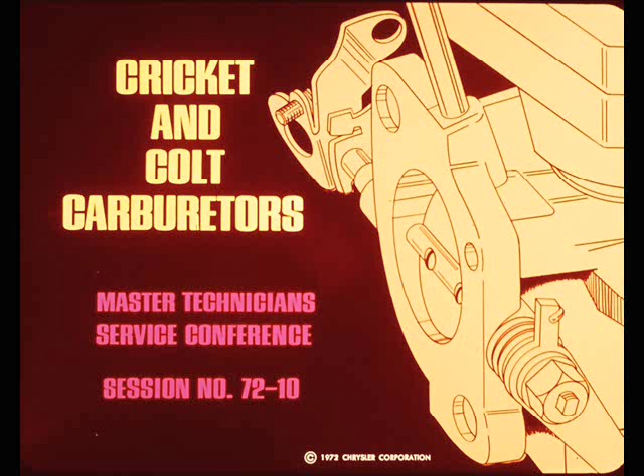Fellas, it's a double feature this time. The subject is carburetors for both the Cricket and the Colt. Either of these cars may show up in your service department, so it will be to your advantage to know both sides of the story.

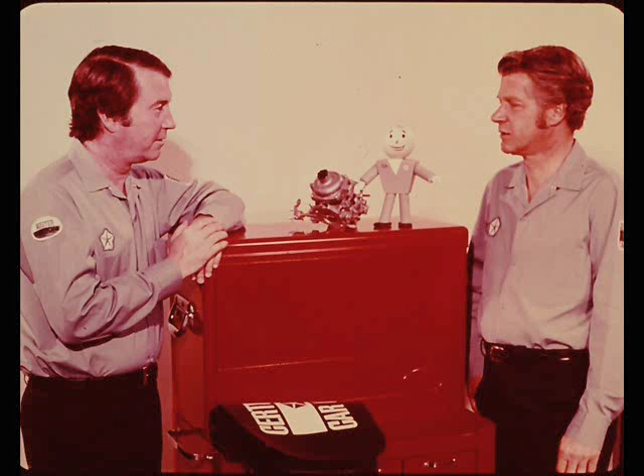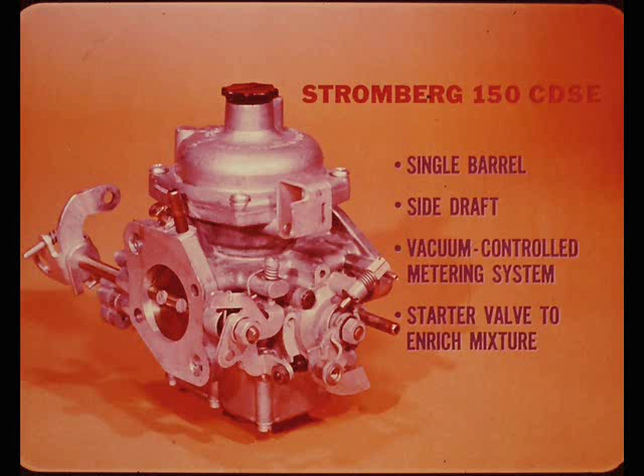And to tell this two-in-one story, we've got two good men. Mike, who knows Cricket carburetors from depression chamber to starter valve assembly, and Fred, our man with the know-how on Colt carburetors. Let's begin with Cricket. Ready, Mike? Ready, Tech. Cricket carburetors look different from more familiar models, so description comes first.

The basic Stromberg 150 CDSE carburetor is a single-barrel side draft type. It has a vacuum-controlled main metering system and a mechanically operated starter valve to enrich the starting mixture.

Some part names also need explaining. For example, CD is the model designation for a constant depression type carburetor. This simply means that there is always some vacuum in the depression chamber when the engine is running. The S stands for a separate starter valve assembly, and the E for emission control.

Now, beginning on the outside of the carburetor, the main components are the depression chamber, starter valve assembly, main body and throttle, float chamber, throttle bypass valve, and the temperature-controlled air bleed valve.

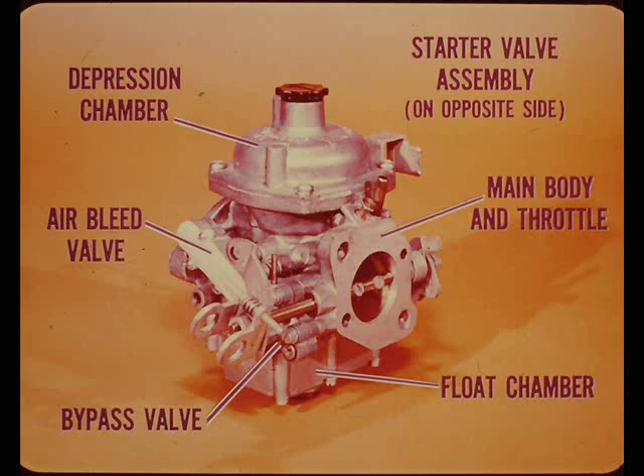On the inside of the carburetor, we have the air valve, including its operating diaphragm and the metering needle, the main jet assembly, and the float and needle valve assembly.

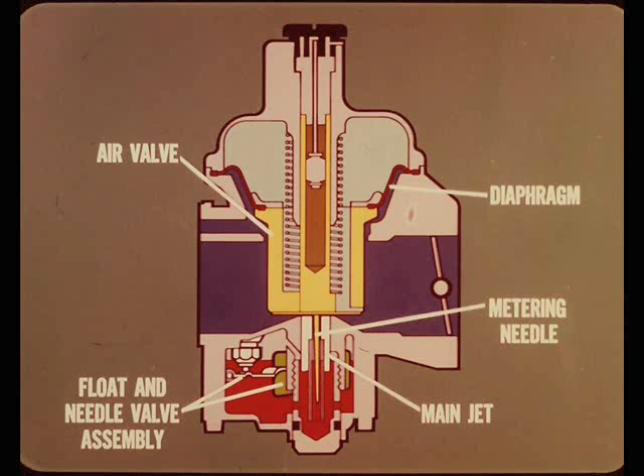Now let's describe the main components. The depression or vacuum chamber is a dome-shaped airtight housing, which also provides an alignment guide for the air valve spindle. This chamber closes off the upper side of the air valve operating diaphragm and the inside of the hollow air valve.

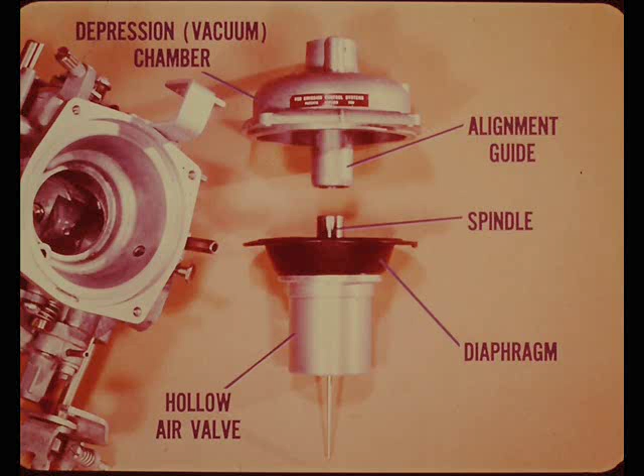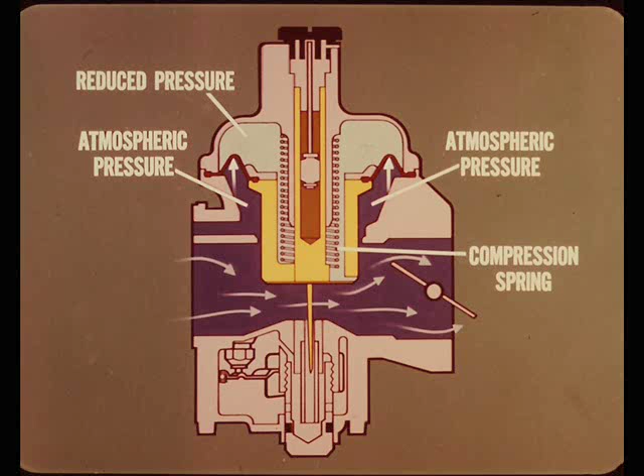In operation, reduced pressure inside the chamber in the air valve allows atmospheric pressure to push upward on the underside of the diaphragm, raising the air valve. A compression-type spring inside the air valve helps to balance the upward movement.

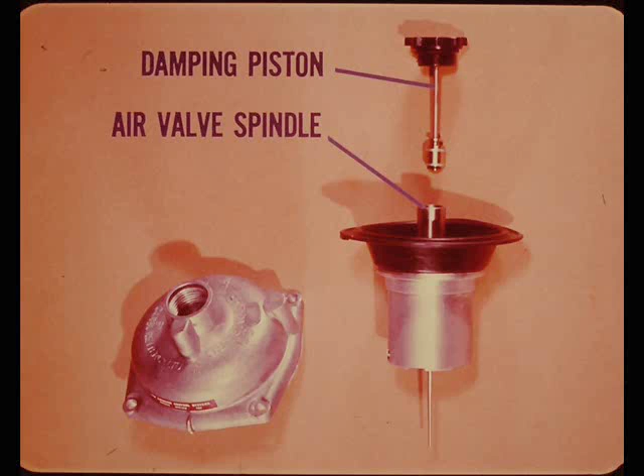The hollow air valve spindle keeps the valve in alignment as it moves up or down. This spindle also forms a cylinder for the hydraulic damping piston and carries the oil used for air valve damping action. Damping piston action prevents the sudden upward movement of the air valve when the throttle valve is opened quickly at low speeds for acceleration.

However, as the throttle valve closes, the spring-loaded air valve can move downward with no resistance when depression chamber vacuum drops because the air space above the damping piston is vented through a drilled passage.

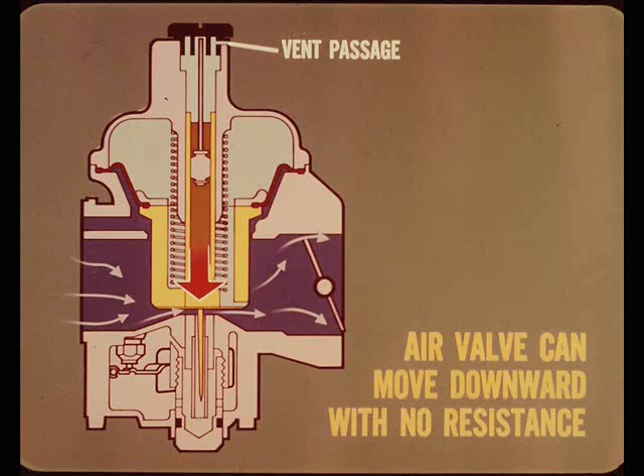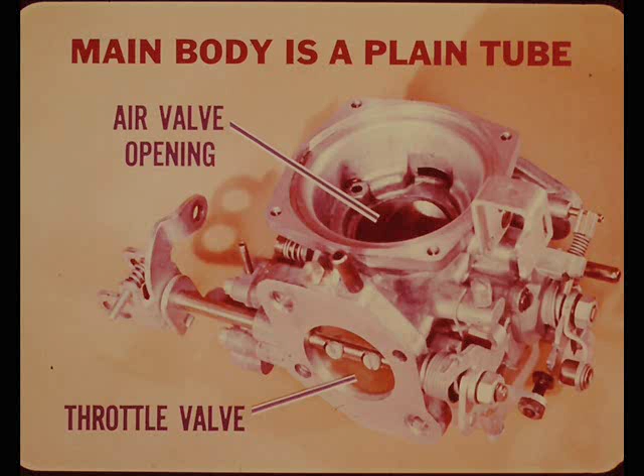Next, we find that the main body of this carburetor is a plain tube with no protruding nozzles or venturis. It has a throttle valve at the engine manifold end and an air valve opening in the midsection. A raised floor section narrows the main bore in the main jet area.

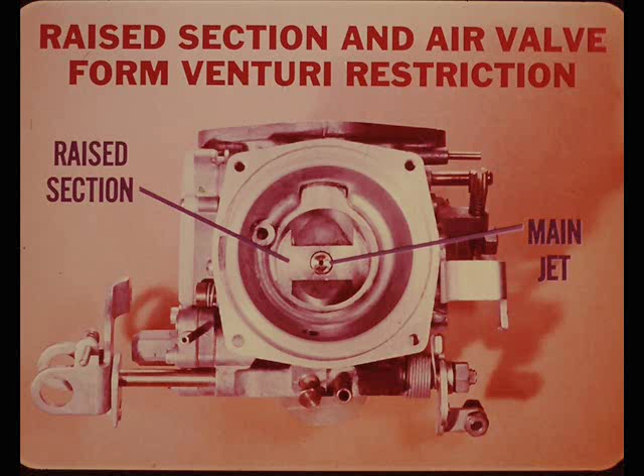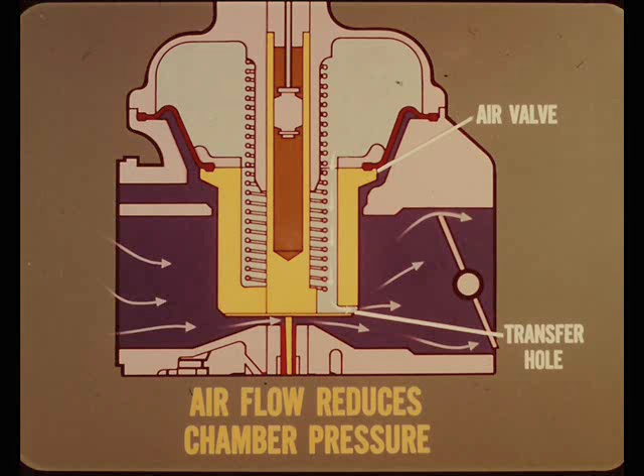This raised section and the air valve form a venturi opening as the valve moves up and down. The air valve is essentially a hollow piston, which is slightly larger in diameter than the main bore. Airflow under the valve transfer holes partially evacuates the area above, reducing chamber pressure and causing upward valve movement.

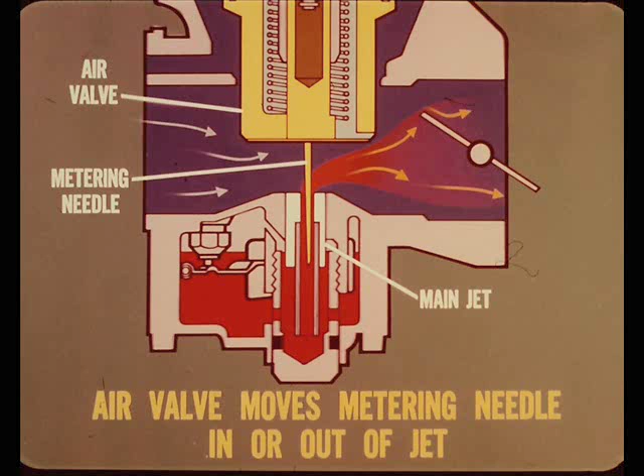The air valve also moves a tapered fuel metering needle in or out of the main jet to control the mixture in direct proportion to the throttle-controlled airflow through the bore. In short, the throttle controls the air valve, and the air valve metering needle controls the fuel flow.

The main jet assembly is basically a calibrated tube extending up from the float chamber into the raised section of the main bore. Since the tapered air valve needle automatically varies the jet opening to provide the correct fuel flow for all engine running conditions, no other fuel metering circuits are needed.

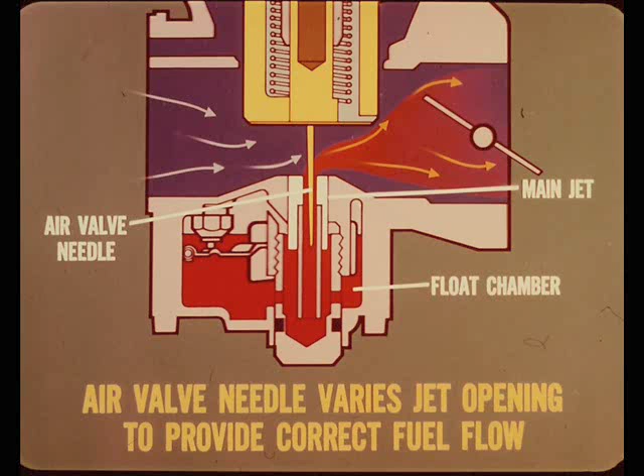At all running speeds, the air valve and throttle regulate airspeed through the bore to maintain a constant flow of air over the main jet opening. This flow atomizes the liquid fuel to help it mix with the incoming air.

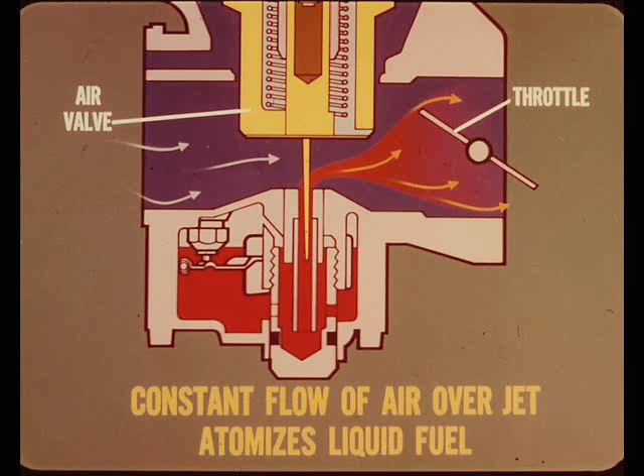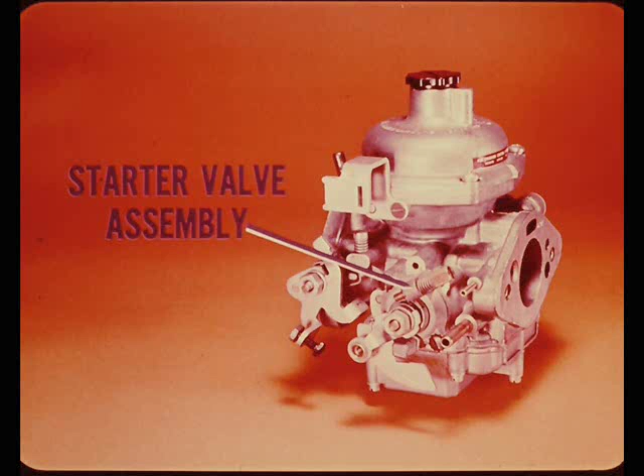The float chamber is a conventional fuel reservoir bowl which feeds the main jet and the starter valve. It has the usual needle valve and float assembly to maintain the required fuel level in the chamber. Now, as I mentioned earlier, the CDSE carburetor has a manually operated starter valve assembly to enrich the starting mixture.

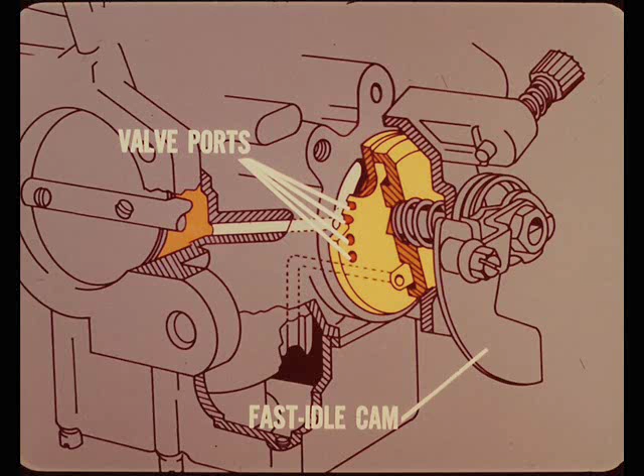This unit produces the same results as a conventional choke valve, but in a different manner. Pulling the choke control out opens one in a series of rotary valve ports to admit extra fuel from the float chamber into the main bore. Control operation also causes the fast idle cam to open the throttle valve to its starting position.

Operation of the automatic choke, or starting valve, used on some models is covered in detail in a Cricket service bulletin, so we can go on to other things.

You're doing a good job, Mike. But I think we need a little more on how the running mixture varies with changing engine operating conditions.

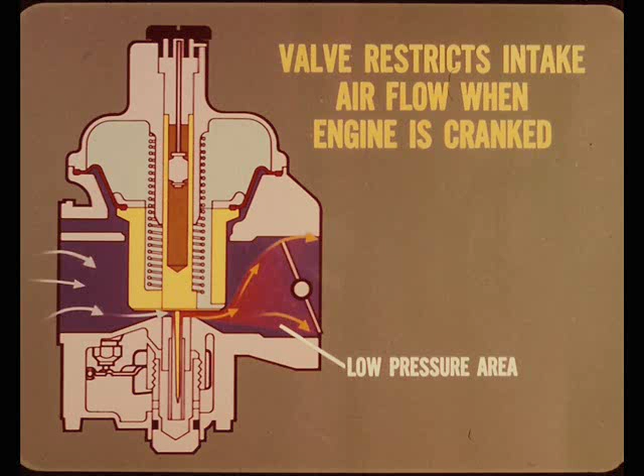Okay, Tech, we'll begin with startup conditions. With the engine stopped, the air valve rests on the raised section in the main bore. The valve restricts intake airflow when the engine is cranked, so we have a low-pressure area on the intake manifold side of the valve. The reduced pressure causes the air valve to lift slightly with each piston intake stroke. This valve action starts fuel flow at the main jet and admits air so the engine can start.

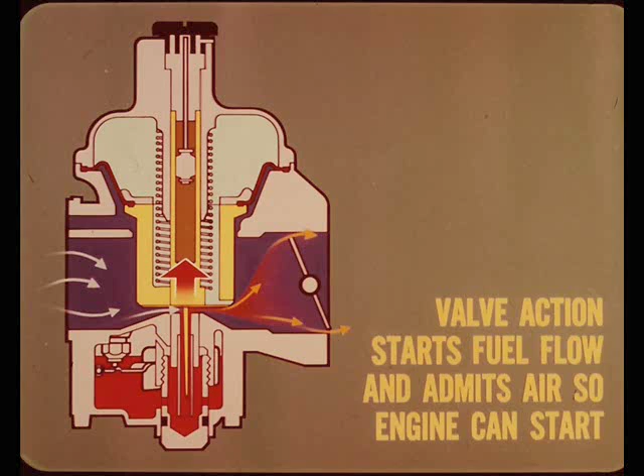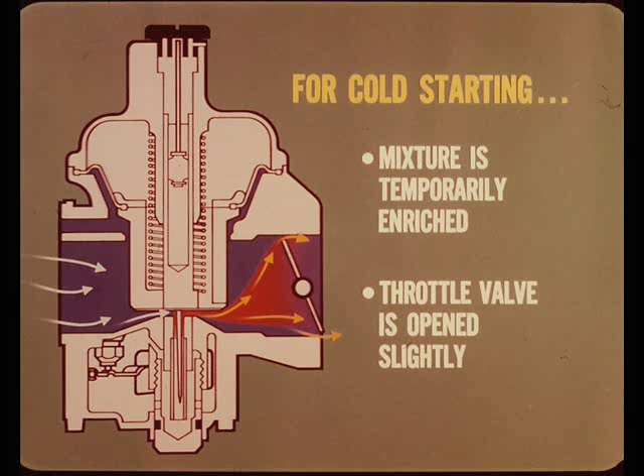For cold starting, additional fuel is usually needed. As you already know, the starting mixture is temporarily enriched and the throttle valve is opened slightly to provide the required mixture for starting and running.

At idling speed, the air valve lifts a small distance above the raised section in the bore. The amount of air passing under the air valve and the quantity of fuel in the mixture are determined by the throttle opening, which is set by the slow-running speed adjusting screw.

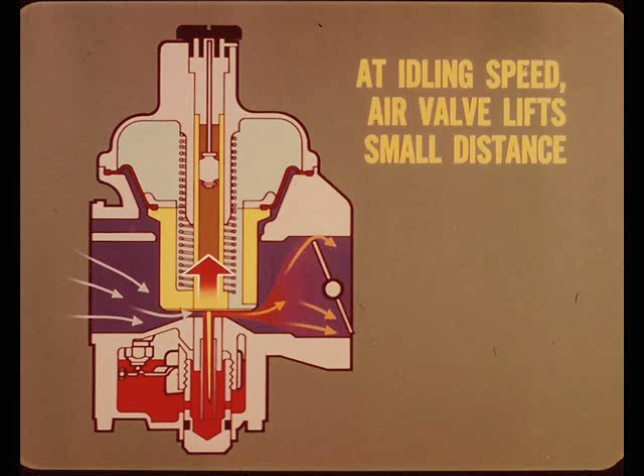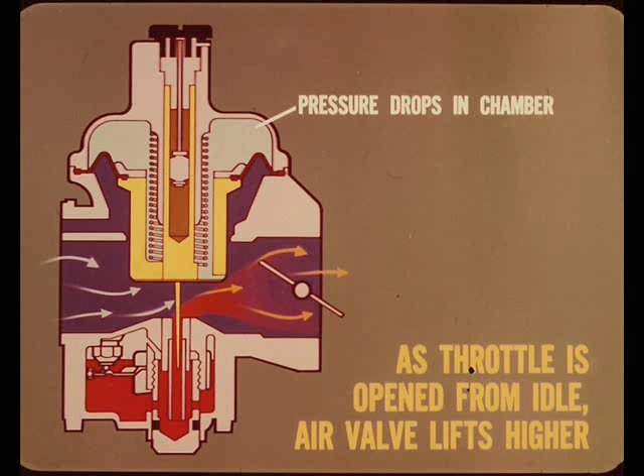As the throttle is opened from idle, airflow under the air valve increases, so the pressure drops in the depression chamber. As a result, the air valve lifts higher in the main bore. And when the increased airflow stabilizes, the pressure in the depression chamber balances with atmospheric pressure below the diaphragm, so the air valve stops rising.

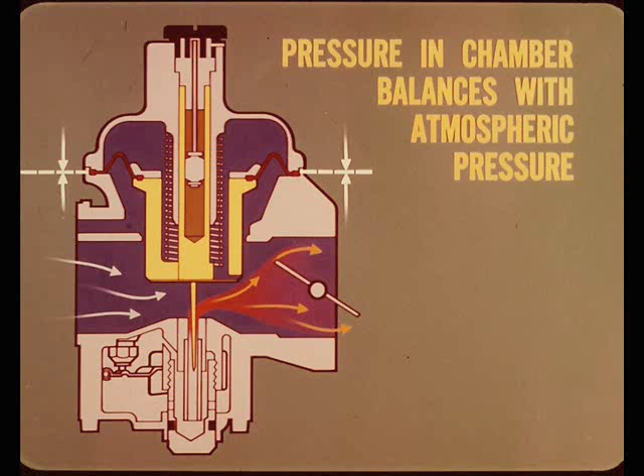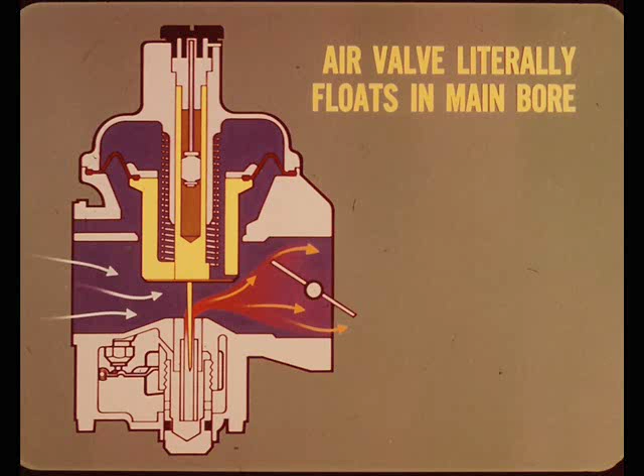In fact, with a constant throttle opening, the air valve literally floats in the main bore. As a result, airflow and fuel flow are controlled to provide the exact mixture ratio and amount of mixture required by the engine at that speed and load.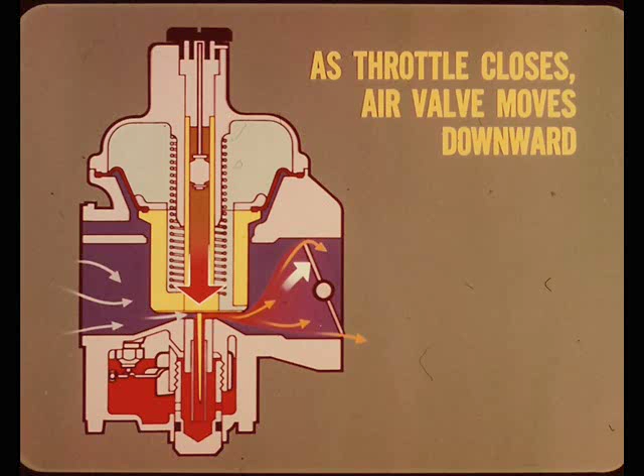In the reverse order, as the throttle closes, less air flows under the air valve, so the valve moves downward. Here, the spring in the air valve performs its other function by helping the valve close.

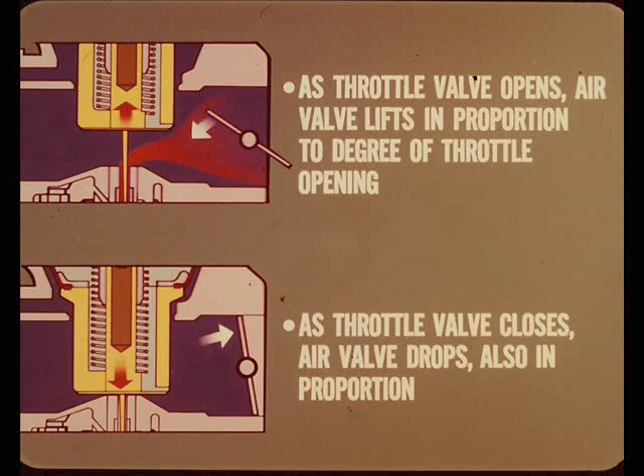Generally speaking, we can sum it up like this: as the throttle valve opens, the air valve lifts in proportion to the degree of throttle opening. And as the throttle valve closes, the air valve drops, also in proportion.

However, heavy loads can hold engine speed down even with the throttle fully opened. Here, the air valve and metering needle raise only to a part throttle position, but the pressure drop on the engine side of the air valve increases fuel flow to maintain power.

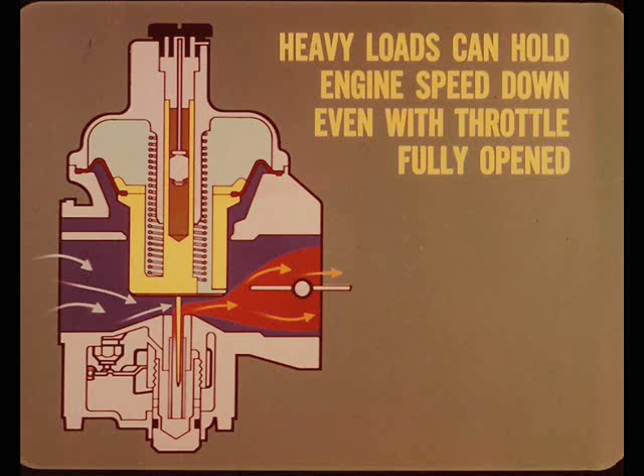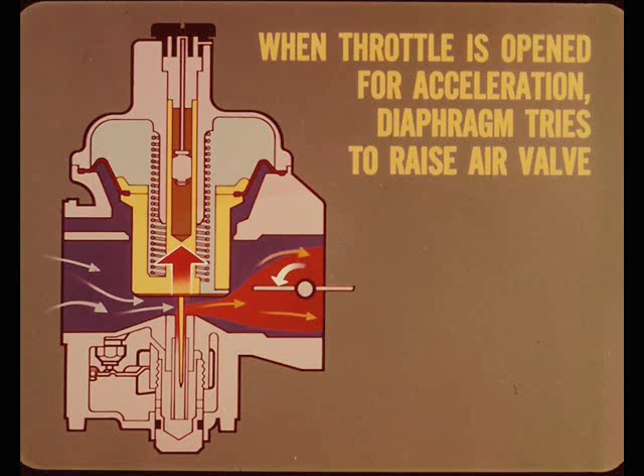In comparison, when the throttle is opened suddenly at low speeds for acceleration, airflow immediately increases under the air valve. This reduces the pressure in the depression chamber, and the diaphragm tries to raise the air valve. If the air valve lifts too quickly, too much air is admitted into the intake manifold, and the running mixture goes lean, causing a flat spot or hesitation.

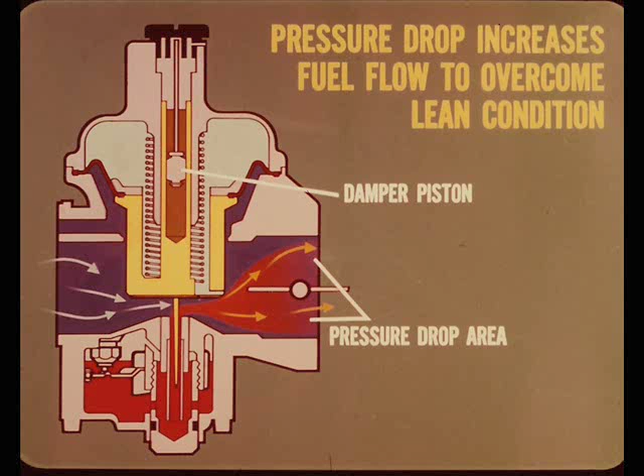To prevent this momentary lean condition, the damper piston slows air valve upward movement, and this restricts airflow through the main bore. The resulting pressure drop on the engine side of the air valve increases fuel flow from the main jet to overcome the lean condition.

The additional fuel flow tapers off as the air valve lifts against damper piston resistance. When the air valve reaches its float position, the fuel flow is normal for the degree of throttle valve opening.

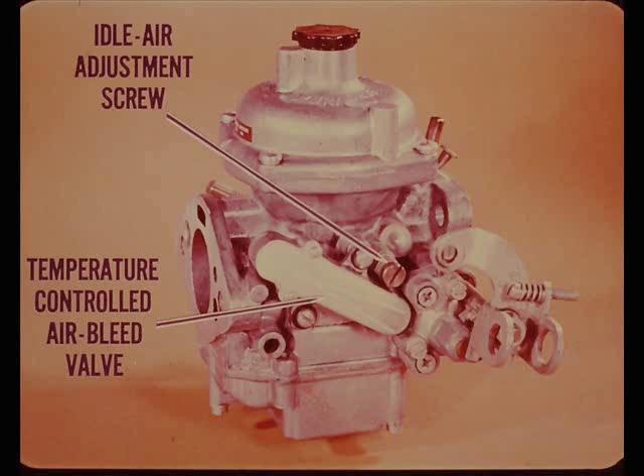And that just about covers the basic CDSE carburetor, except for the slow-running or idle air adjustment screw and the temperature-controlled air bleed valve. These carburetors also have a throttle bypass valve, which provides running mixture to keep emissions low when the car is coasting with the throttle valve closed. This bypass mixture maintains good combustion to keep unburned hydrocarbon emissions low. And there's more about these features in the reference book.

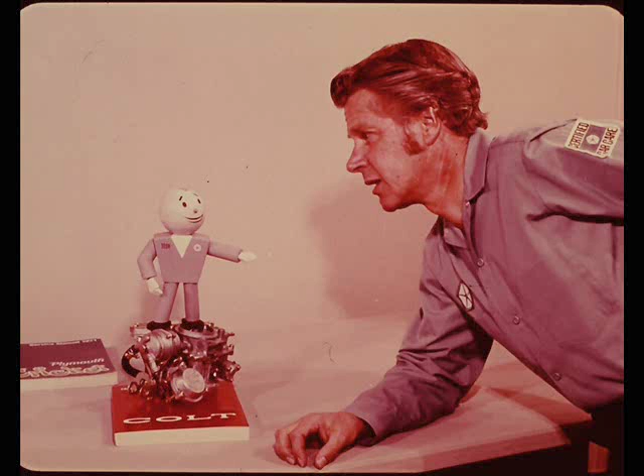Well, my job should be fairly easy because this carburetor and its parts look more familiar. But we'd best begin, as Mike did, with an overall description.

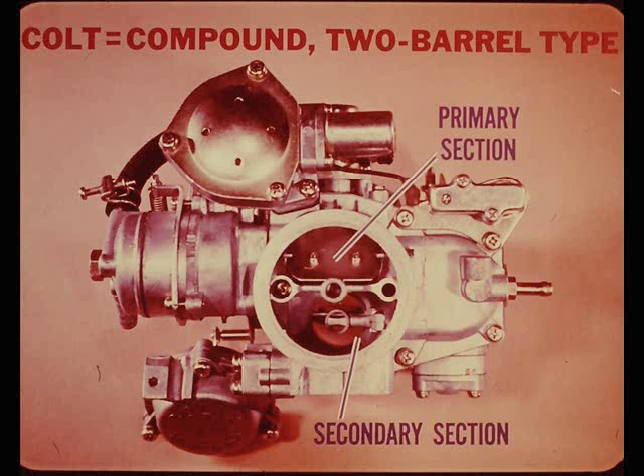First of all, the Colt carburetor is known as a compound two-barrel type. All this means is that we have, in effect, a four-barrel carburetor split in half to provide single primary and secondary sections. Now, let's identify the main components.

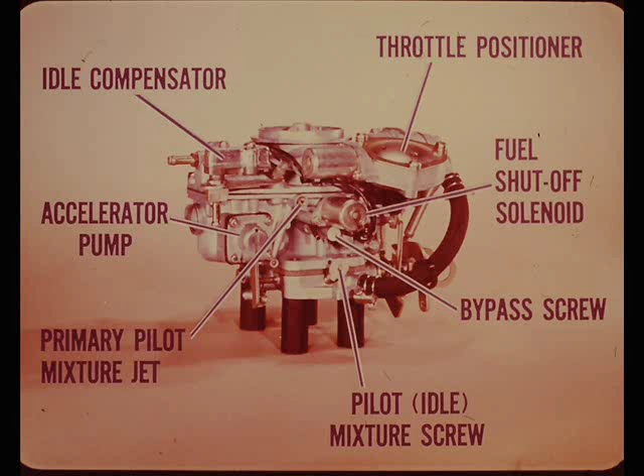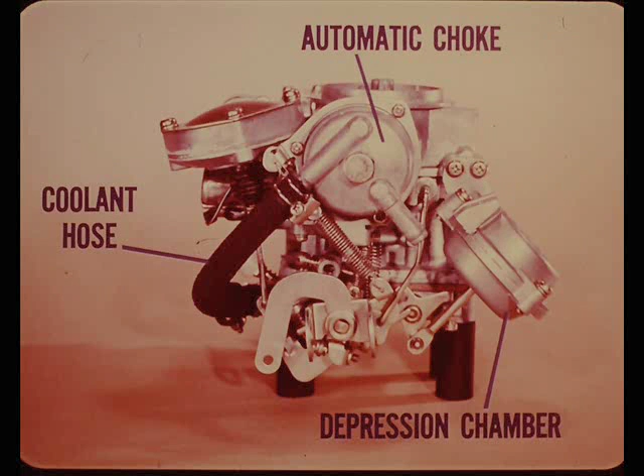Viewed from the left or outboard side, we have the idle compensator, the primary throttle positioner assembly, the fuel shutoff solenoid valve, the bypass screw, the pilot or idle mixture screw, the primary pilot mixture jet, and the accelerator pump assembly. On the firewall end, we see the automatic choke assembly with an engine coolant hose to the throttle body, the depression chamber, which operates the secondary throttle valve, and the levers, linkage, and adjustment screws, which we'll describe more completely farther on.

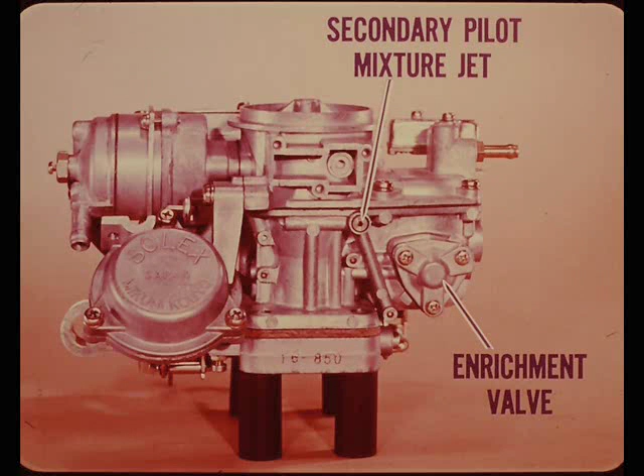The side facing the engine has the secondary pilot mixture jet, which is similar to the primary mixture jet on the outboard side, and the primary mixture enrichment valve assembly.

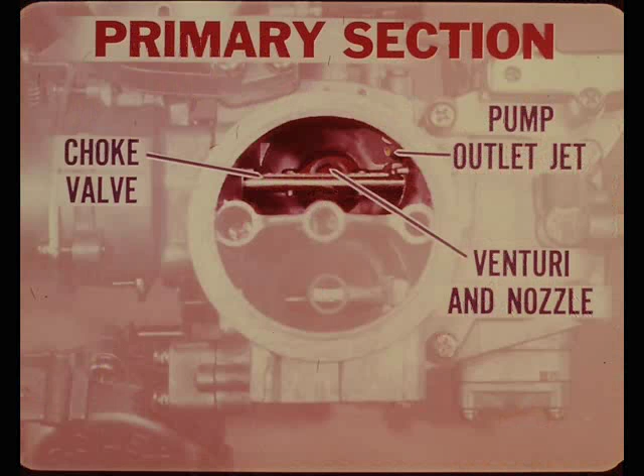As we look down into the primary section, we see the choke valve, the accelerator pump outlet jet, the primary venturi, and main nozzle. This section also has a primary bypass port and a pilot or idle port below in the throttle valve area.

The secondary section also has a venturi and main discharge nozzle, plus an idle port. The secondary throttle valve remains closed until opened by the vacuum-operated depression chamber assembly.

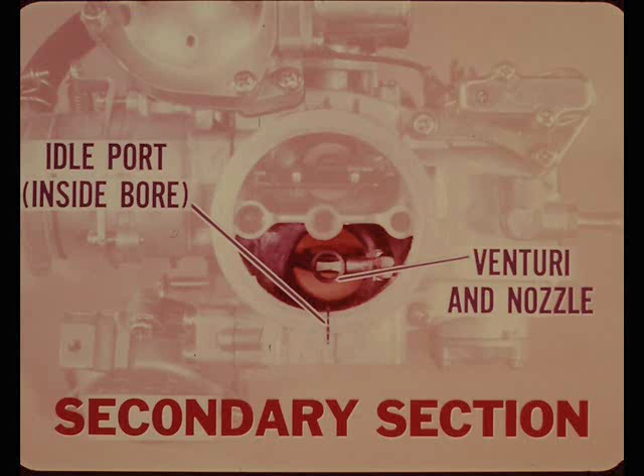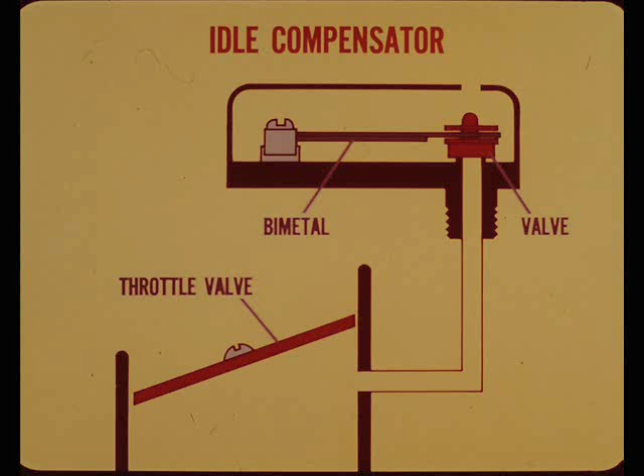Now, as for the individual component functions, the idle compensator is a bimetal-controlled, temperature-sensitive valve which admits air below the throttle valve to offset flooding and hard starting when carburetor temperatures are high. As the name suggests, this valve is most effective at idle and off-idle speeds.

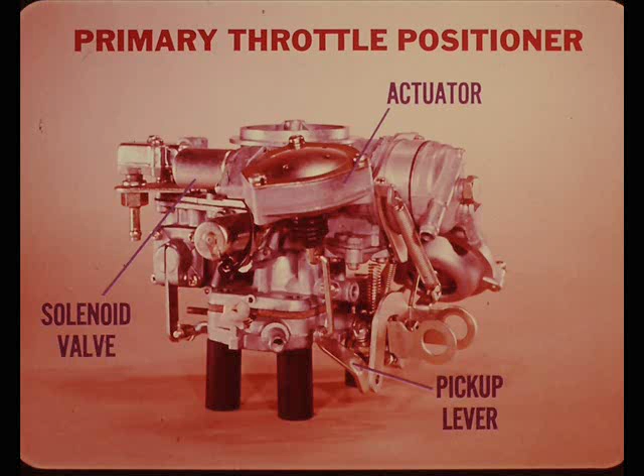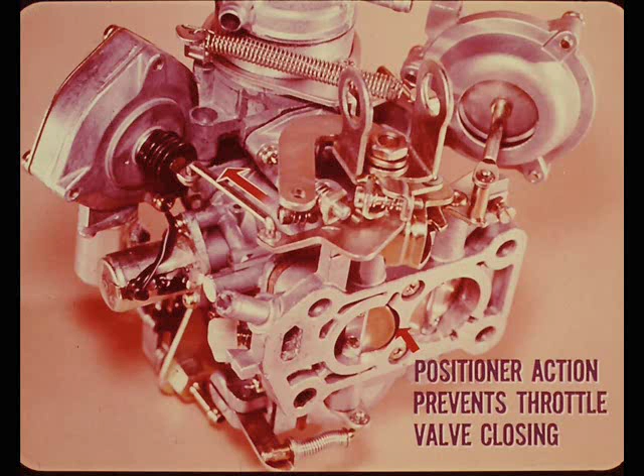The primary throttle positioner is basically a vacuum actuator linked to a pickup lever which contacts the primary throttle lever. Positioner vacuum is controlled by a solenoid valve operated by a speed-sensitive governor switch. In operation, throttle positioner action prevents the primary throttle valve from closing until engine RPM drops below 1600. This throttle closing delay helps to control exhaust emissions by maintaining a good combustible mixture when the car is decelerating.

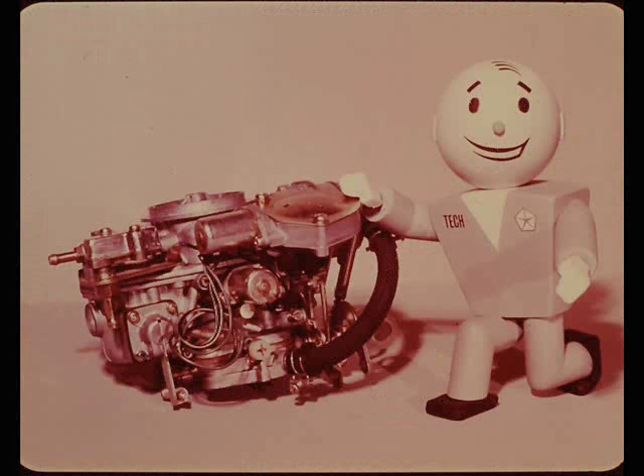Just remember that when the throttle positioner is on, you get a freewheeling effect on a coast down. When the positioner releases, the resulting effect feels like a transmission downshift.

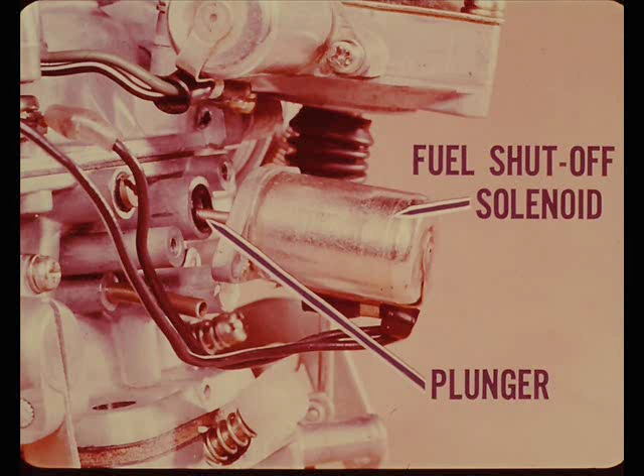What's next, Fred? The fuel shutoff solenoid plunger cuts off flow in the primary idle system when the ignition switch is turned off. This shutoff action permits the use of a relatively high idle speed to reduce emissions without the disadvantage of after-running. The bypass screw, located directly under the fuel shutoff solenoid, is adjusted and sealed at the factory.

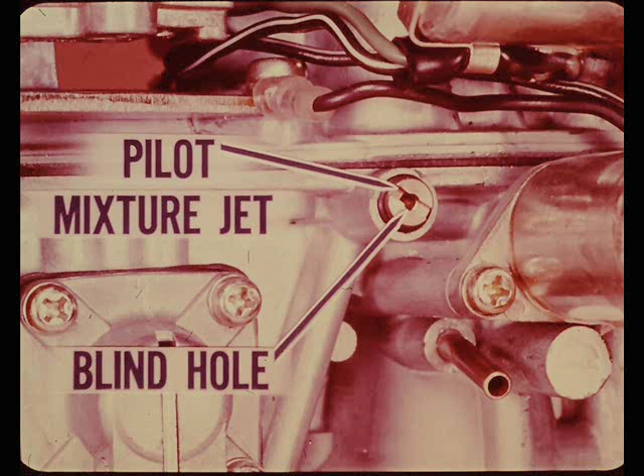The primary pilot or idle mixture adjusting screw has the usual plastic cap, which limits its maximum rotation in either direction. The primary pilot mixture jet meters fuel from the main jet well as it flows to the idle port in the primary main venturi.

Don't be fooled by the blind outer hole in these jets. It doesn't go anywhere. Right, Fred? Right, Tech.

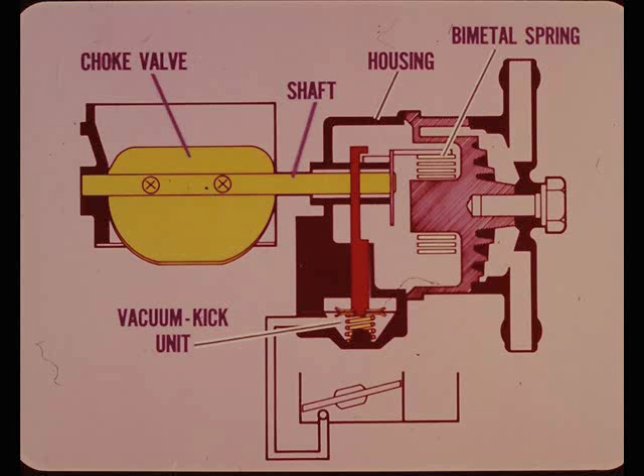Next, we have the automatic choke assembly, which includes the fast idle mechanism. Engine coolant flows through the choke outer housing to keep choke operation closely matched to engine temperature. The choke valve is attached to a solid shaft extending from the choke mechanism housing directly into the primary venturi. This valve is closed by a conventional bimetal coil spring, which is opposed by a diaphragm-type vacuum kick unit.

The fast idle cam is located on the choke shaft behind the shaft operating lever. The cam and lever are connected by a light spiral spring, which loads the cam in the on direction as the choke closes. Now, let's see how the choke operates.

As the choke spring cools, it closes the choke valve. However, the fast idle cam lever locks the cam in the off position until the gas pedal is depressed.

When the cam is released, the light coil spring moves the cam into an appropriate fast idle position. The fast idle cam follows the choke spring and moves in the high step direction as choke spring tension increases, producing an idle speed in proportion to the choking mixture.

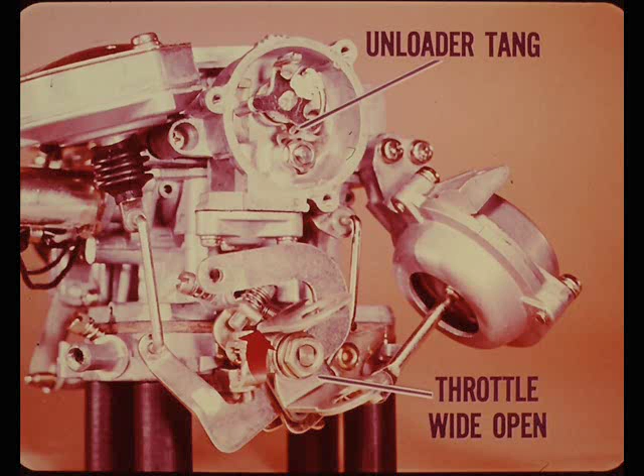As a final point here, an unloader tang on the cam lever partially opens the choke valve when the throttle is held wide open. This action aids starting by helping to clear the manifold of over-choking or flooding conditions.

Now, moving on, the depression chamber is a simple vacuum actuator which opens the secondary throttle valve when the driver demands more power and performance. The chamber connects to ports which open into both the primary and secondary venturis.

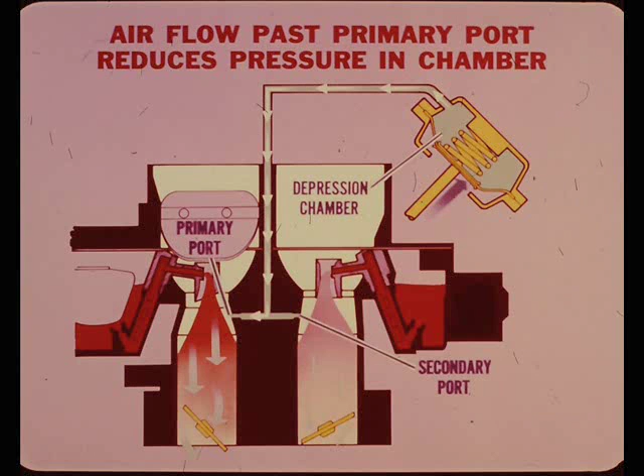Here's how it works. When the primary throttle opens beyond the medium load range, increased airflow past the primary port reduces pressure in the chamber enough to open the secondary throttle valve part way. Additional airflow past the secondary port then helps to open the valve fully.

Next, on levers, linkage, and adjustment screws, the names explain the functions. Here we have the primary throttle stop or idle speed screw, the primary throttle positioner adjusting screw, the fast idle cam adjusting screw, and the secondary throttle stop screw.

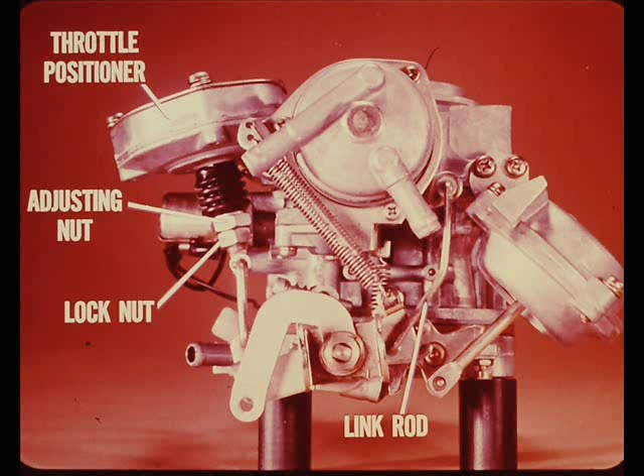On earlier models, you adjust the throttle positioner at the positioner stem. Also, the fast idle cam is set by bending the cam lever link rod. The remaining adjustments are essentially the same on all Colt models.

Thank you, Tech. Now, moving to the engine side, we have the secondary pilot mixture jet, which has the same basic function as the primary pilot jet. If you switch these two jets around, there'll be trouble. And if they're loose, you can get rough idle, surging, and power loss. So be careful. Good points, Tech.

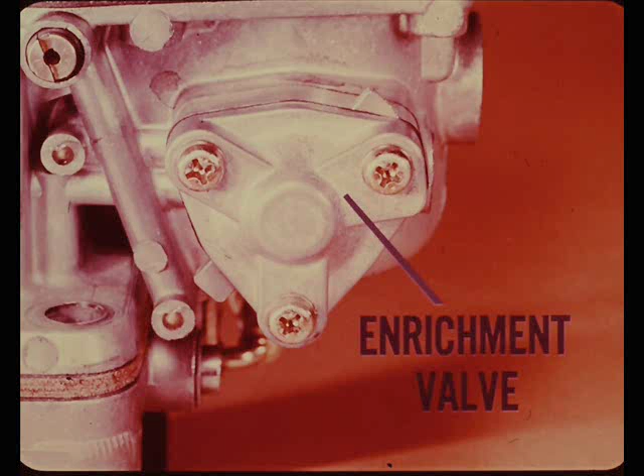The remaining component on this side is the enrichment valve. It's vacuum diaphragm operated and admits extra fuel into the primary main discharge circuit when a power step-up is needed.

We've already talked about the fuel level window and checking the level. However, if adjustment is needed, be sure to bend the float support plate at a point away from the needle valve.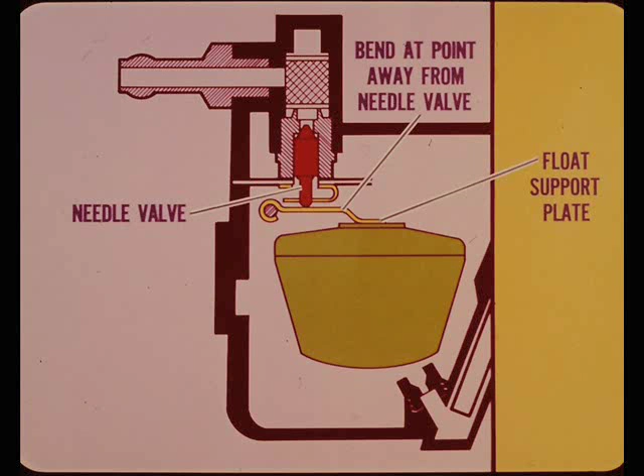Now, to help in troubleshooting, let's describe internal circuits. The slow speed or idle circuit feeds fuel from the primary main jet through the pilot jet. The circuit discharges at the bypass port or at the pilot outlet, depending on the position of the throttle valve.

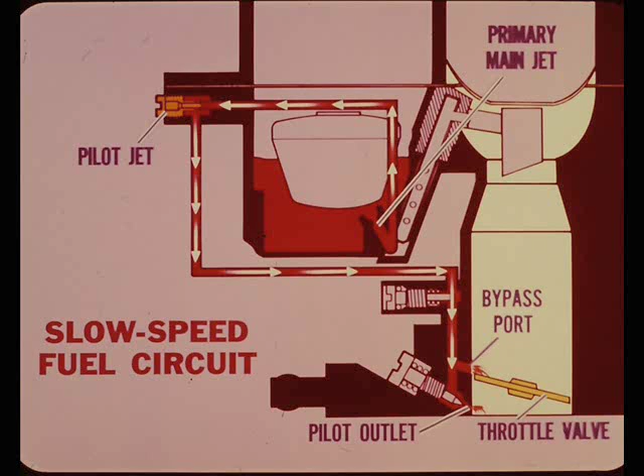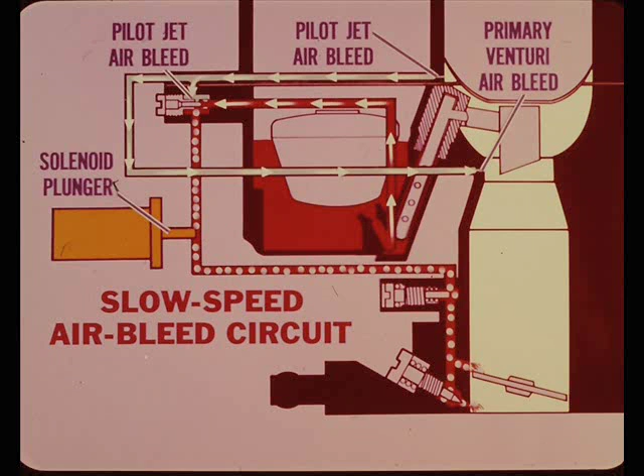At the same time, bleed air is admitted at the primary venturi and through the pilot jet to produce the correct bypass and idle mixture. This mixture flows normally when the fuel shutoff solenoid plunger is retracted, but stops when the plunger blocks the mixture passage.

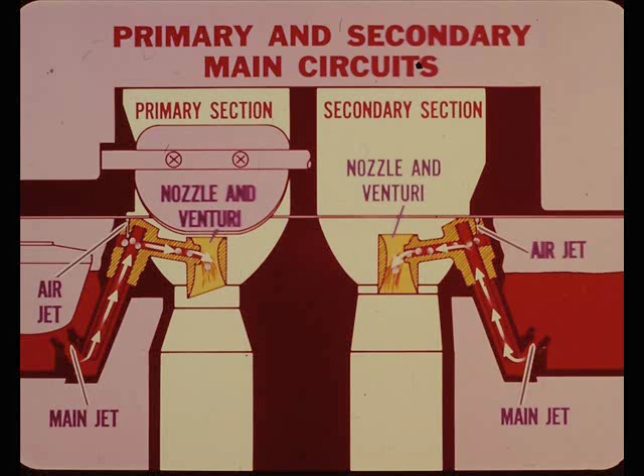The primary and secondary main circuits both feed from the float bowl through separate jets. Bleed air is admitted to both sections through air jets in the separate nozzle and venturi assemblies.

The accelerator pump circuit feeds into the primary venturi. Fuel from the float bowl flows past an inlet check valve into the pump. From the pump, fuel flows past an outlet check valve to the jet nozzle.

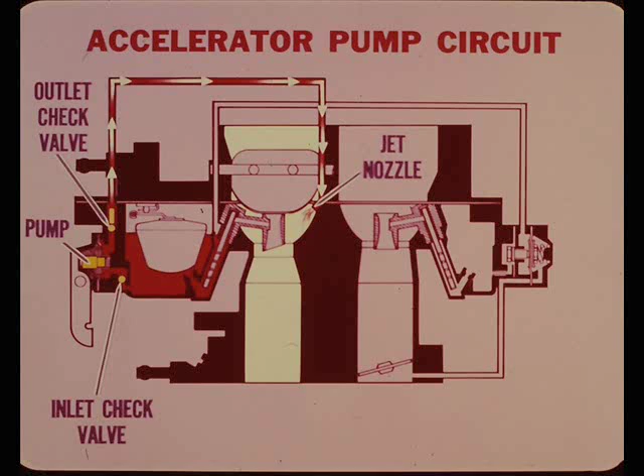In addition, the enrichment circuit also feeds into the primary venturi. Fuel passes from the float bowl through a jet into the enrichment valve. The manifold vacuum which operates the valve is routed from a port below the secondary throttle valve.

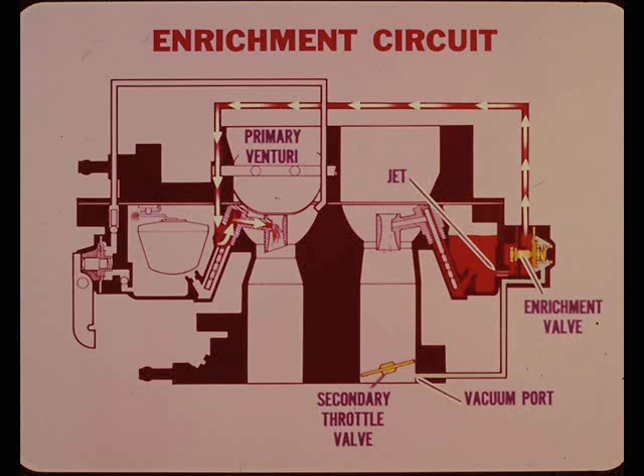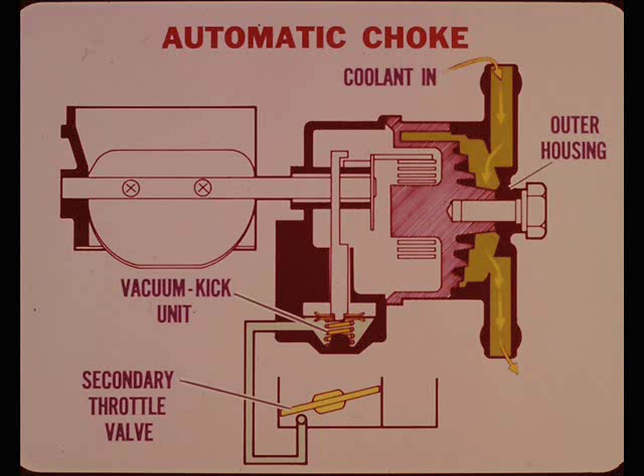Next, the automatic choke has two circuits. One routes vacuum from below the secondary throttle valve to the vacuum kick unit. The other leads coolant from the engine block into the choke outer housing and then back through the throttle body passage.

The throttle positioner assembly also has two circuits. The vacuum control valve solenoid circuit includes the governor switch and a clutch or transmission switch. Operating vacuum is routed through a passage which opens below the primary throttle valve.

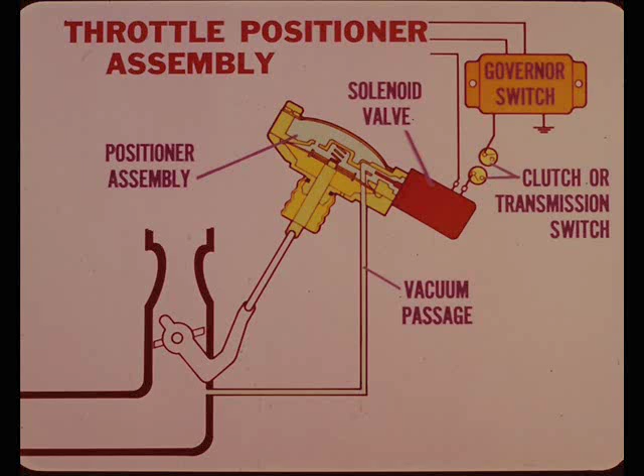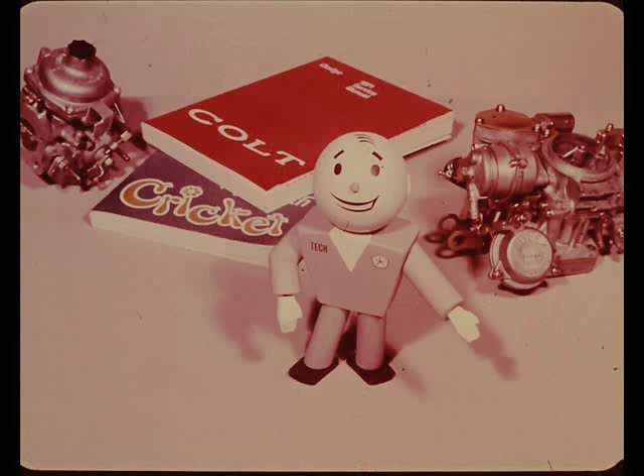Well, Tech, except for specific adjustment procedures, that's the story on the Colt carburetor. And it's a good place to break off because we don't have time left to get into those details here. Anyway, the service manuals and bulletins should always be checked for the latest specifications and service information.